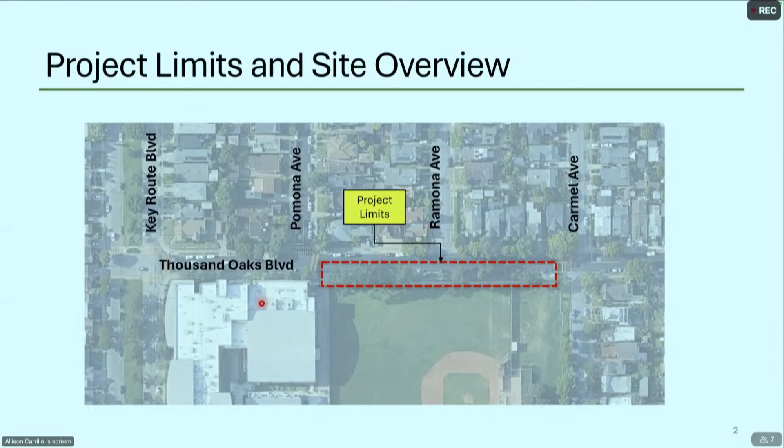There you go, the project limits are shown. The impetus of this project has a lot to do with incremental improvements done in this area over the last period, including early in the 2000s when the Thousand Oaks Boulevard sidewalk was reconstructed in front of Albany High School.

There was an extension of the sidewalk on Carmel Avenue in the early 2000s, and then a recent extension as part of the dog park project. What that's created is a legitimate gap, where we have pedestrian paths of access on all sides and a center path that does not meet ADA requirements.

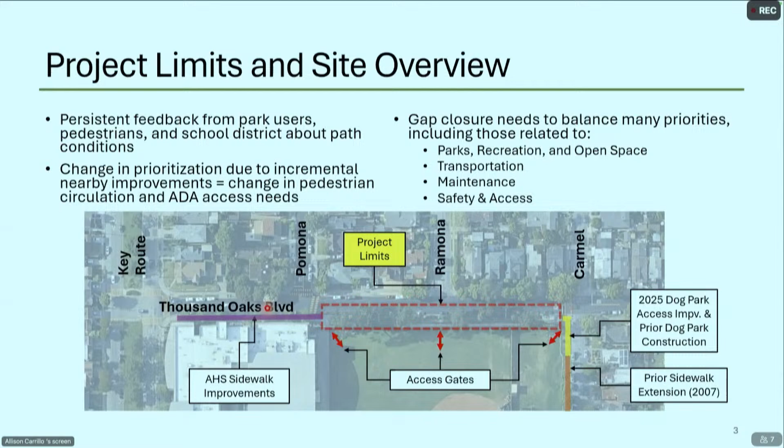So this existing path is in poor condition. I understand there are some people in the neighborhood. It's impassable for anybody in a wheelchair. We aren't able to repair it any longer. This is in a condition where it's a full rebuild.

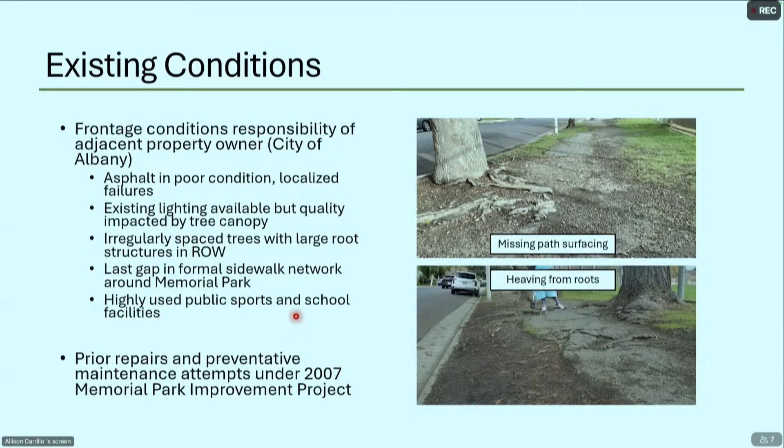The path condition has something to do with the root upheaval we're seeing, but also just age. It's just an aging path, and it's highly used for both access to Memorial Park, the public sports fields, and school facilities in all directions. There were prior maintenance attempts in 2007, but they did not last and still need work.

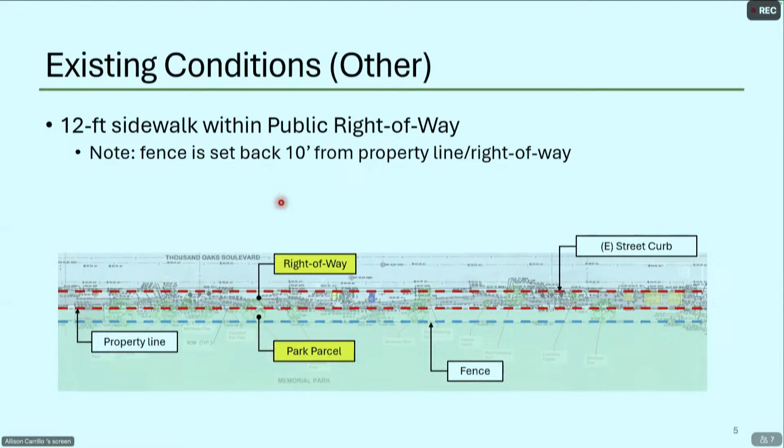Other existing conditions: while it looks like a very wide right-of-way, the fence is actually set back about 10 feet. So the right-of-way itself is a 12-foot right-of-way as it exists, with a 12-foot sidewalk within the right-of-way as currently exists.

Inside this area, there's a number of trees, irregularly spaced. We have 7 Monterey pines, primarily on the southern side of that area within the parcel. Inside the right-of-way, we see cedars, gum trees, Australian tea trees, and California peppers.

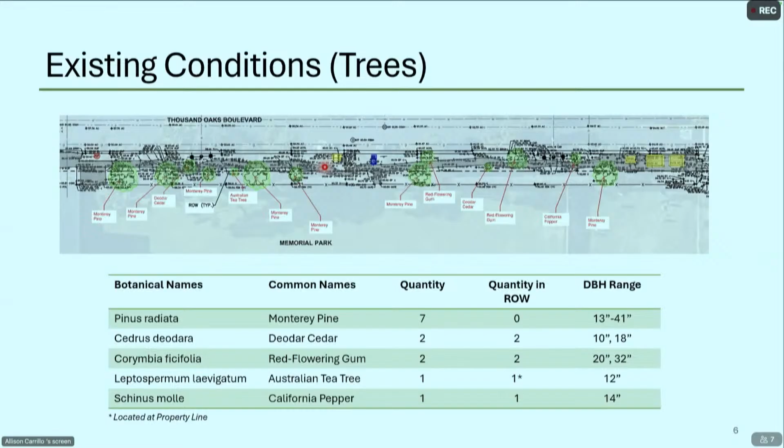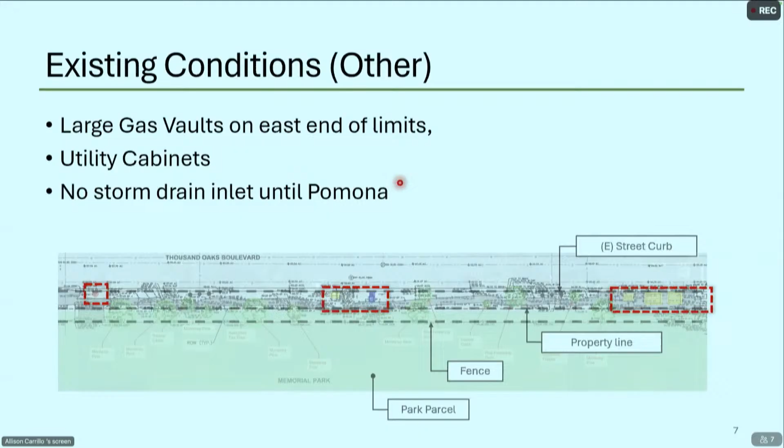Additionally, there are some large gas utility vaults on the eastern end, utility cabinets that dot the frontage, and there's no storm drains until we hit Pomona.

Existing conditions on the roadway are actually quite interesting. The varying width, to me as a civil engineer, maybe less so to others, but the street actually narrows next to the high school. So there's a 32-foot wide roadway at the high school side, and it widens out to 36 feet in the area of the actual project. There's some discussion about this later, so I just want to bring that up, that it's not a consistent roadway width.

We have received complaints about the narrowed roadway between Pomona and Key Route.

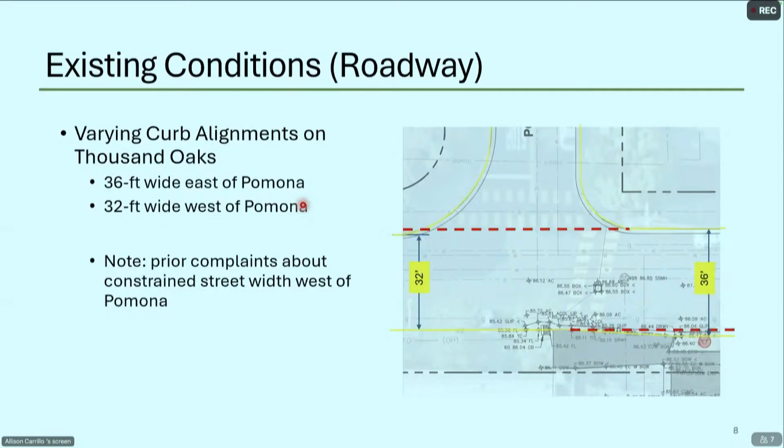The existing condition on the sidewalk is 3.5 to 4.5 feet wide. 4 feet is the minimum by ADA requirements, and 5 foot is our city standard. 5 feet is what we also need in order to avoid having to have passing space every so often for people under ADA. Now, the connecting sidewalks are very different, and to be fair, this is not a sidewalk.

It's more like a park path, the existing pathway. But the formal sidewalks to either side range from a 12-foot wide sidewalk with tree wells in front of Albany High School, to 5-foot wide curbside sidewalks on the Carmel side. In both cases, the sidewalk is immediately adjacent to parking.

So when we're looking at the design and conceptual planning for this project, we're trying to balance out the need to preserve trees or minimize impacts to trees, pedestrian circulation needs, and the adjacent public facilities and infrastructure. The trees are beautiful and we want to preserve as many as we can within a reasonable outcome. Pedestrian circulation is important for park access, school access, and also the ball fields and sports. Additionally, we really want to make sure that whatever work we do here is durable and long-lasting.

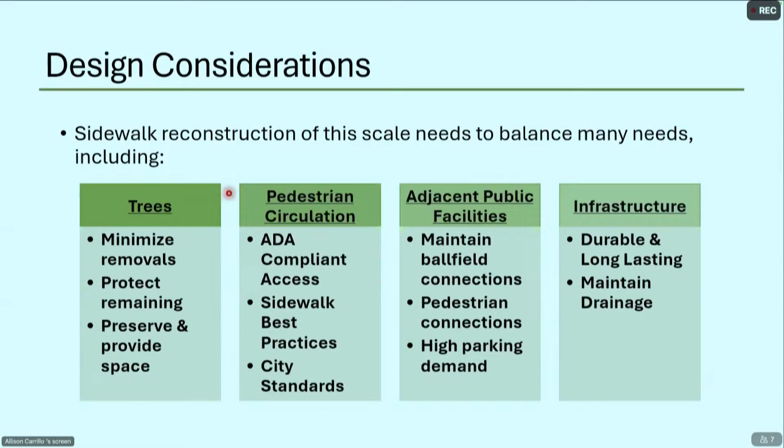With that, I'll jump into a brief overview of the details of the 3 alternatives that were posted. Alternative 1 is essentially trying to keep the path in its existing condition, weaving between trees, but widening it to become a formal concrete sidewalk. While this type of meandering sidewalk is discouraged under ADA, it's not prohibited. We would be looking at trying to straighten the path out, because right now there are some very sharp turns on it, but it is more challenging for people who need mobility devices.

Go back to that. So you can see here I'm representing where the path is located in space with this box in yellow.

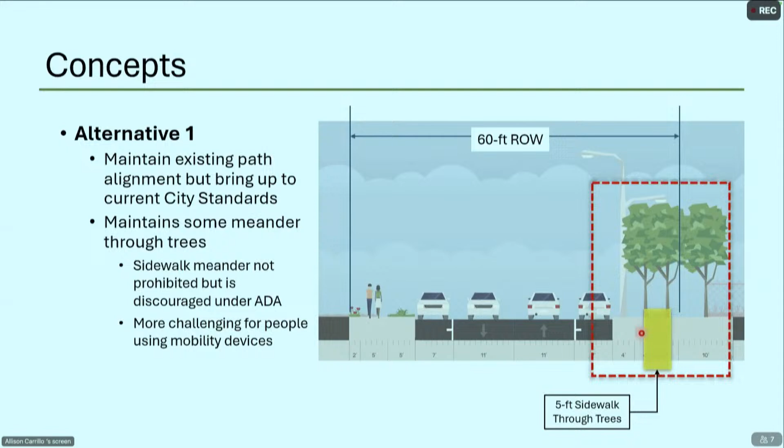Alternative number 2, we're looking at something more similar to what exists at the 2 connecting sidewalks. What we show in the alternatives is a 12-foot sidewalk, to match the Albany High School version, and that allows for tree wells on the curbside as well as a planting space behind the property line next to the fence.

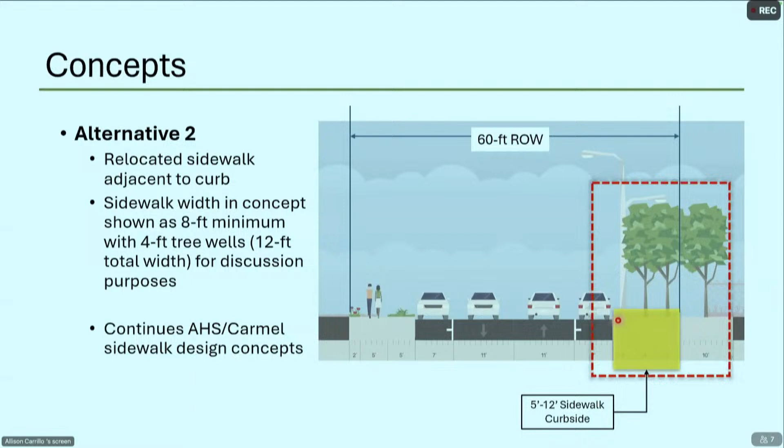But it can be narrowed down to 5 feet. So just a quick view of what it looks like - this is Albany High School, and then Carmel.

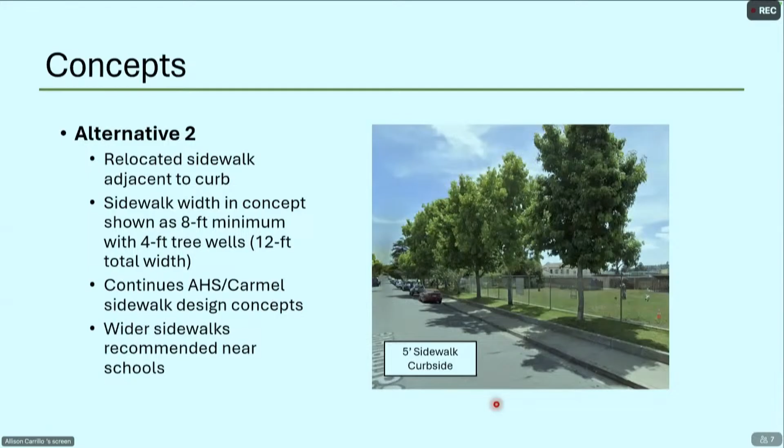So the last alternative, what I'm calling alternative 2A, because it really is an expansion of the second alternative rather than a fully new concept, is to look at balancing the width of the sidewalk, and looking at ways to gain a few extra feet because this roadway is wider in this area than the constriction to the west.

This wouldn't be restricting it down to 32 feet, and that's where we're getting the complaints. We're looking at potentially a 2-foot curb adjustment, and what that does is give us a little extra room so we're getting further away from some of the larger trees next to the fence line.

However, doing this option does require more detailed communication with the Transportation Commission and community, because it's a wider change that impacts more than just the sidewalk or curb to property line area.

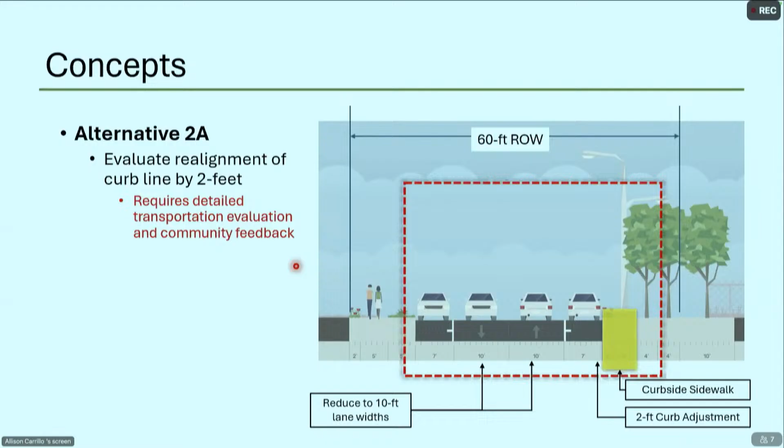It moderately increases the amount of pervious area here because we would be moving some of the roadway into part of the sidewalk, minimizing reduction in infiltrative areas. And it's similar in cost and scope to alternative 2, assuming a similar sidewalk width.

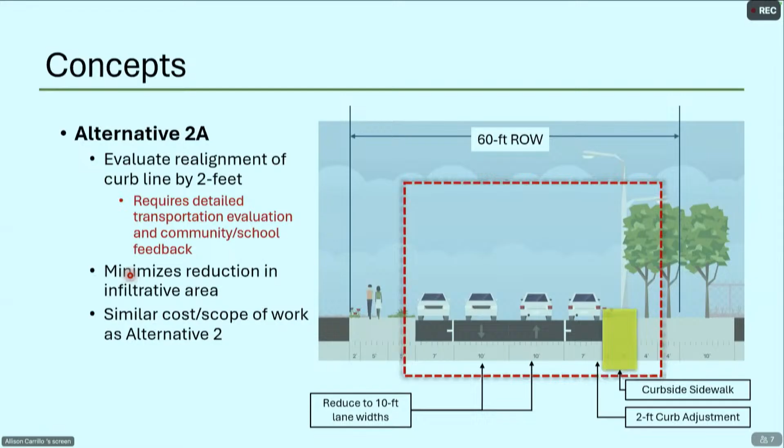So without getting into great detail on the plans themselves, I want to go over some comparisons. With alternative 1, going back to how I started this meeting talking about looking to the future and placemaking, not a simple repair - if we keep to the existing condition, we're formalizing the irregular path and tree layouts.

With alternative 2, it's the best for navigation by people with visual impairments or mobility devices - it keeps your path of travel the most straight. Alternative 2A would have some gentle curves.

In terms of the trees, trying to still keep the path in its existing condition, we'd be very close to root flares on a lot of trees. Without detailed design it's hard to tell exactly what the impacts are, but it also maintains irregular spacing and irregular planting spaces for future trees.

Alternative 2 is interesting because it allows for more moderately sized trees on both sides of the path, since you could potentially have tree wells and planting and trees against the fence - creating a kind of a tree-lined walking path.

But the tree wells would be small - 4 foot by 4 foot planting spaces - and overall would have less planting space for trees.

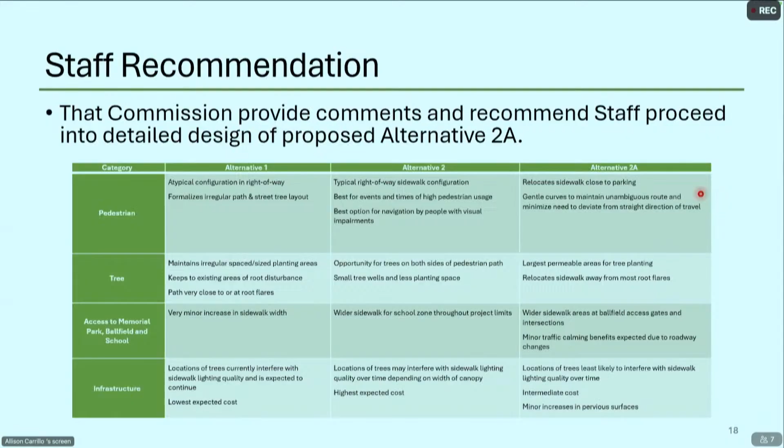Thank you. You don't want to talk more? There's plenty of time. Good. All right, we'll take it back to commission questions. Any quick questions? I think you laid it out very clearly.

So on option 2A, you mentioned that the curb would be moved into the street a little bit, and it's still listed as a moderate expense. That seems like a big expense, but maybe it's simpler than I thought. Is there no interference with the drainage? We don't believe so. In terms of the expense, the reason why it's a moderate expense is that we would not have the 12-foot sidewalk width with that option the way it's laid out here. So it's a 5-foot sidewalk, which is less costly.

Alternative 2 already requires that we rebuild the curb and gutter in order to do the work, so it's an expansion with a slight decrease in sidewalk width compared to alternative 2. Alternative 2 is the most costly, simply because of the amount of concrete we'd be doing, and likely more tree removals as well. That's alternative 2, where we're matching the school district and Carmel Street aesthetics and approach. Back to 2A, we would be trying to narrow that sidewalk width a little bit more, so the cost would likely be less than alternative 2, but still more than alternative 1.

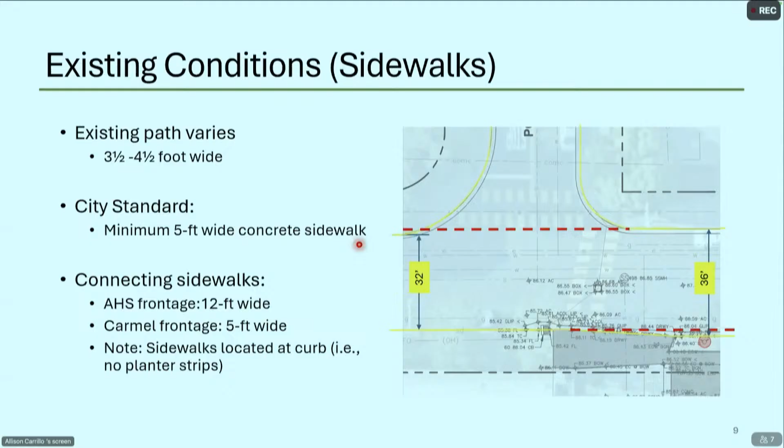Okay, we'll bring it back for discussion. And really, you're looking for feedback and some direction very early. You can't really say what trees might be removed or not because it's much too early for that. But what do we think?

I just had a couple - that's a really good question. I'm looking at the street view. I still can't quite wrap my head around how it's still a straight line, but I trust you.

But one thing I'd say is, I appreciate the alternative 2A and the staff thought that went into that as a really nice creative solution. And I feel like it's in line with a lot of other sort of taking back the streets and giving more to the public to enjoy. So I really like that trend.

I do think it would be great in terms of pitching this to talk about aesthetic benefit, right? I don't know that that's really included there, but I do think a larger sidewalk and more space to walk, bigger tree wells, is an aesthetic benefit and a quality of life improvement in and of itself. So I just want to say I think that would be nice to include in there, in the sort of flow chart that you have.

But I'd also say that I appreciate the emphasis on trying to keep the trees. I would say that some of those trees are mature, but they're not large canopy. They're actually kind of spindly. I think there's a way, when we had the street tree management plan and that whole analysis of the canopy, that's an example. Those are several examples of big mature trees with very little canopy, not even much shade.

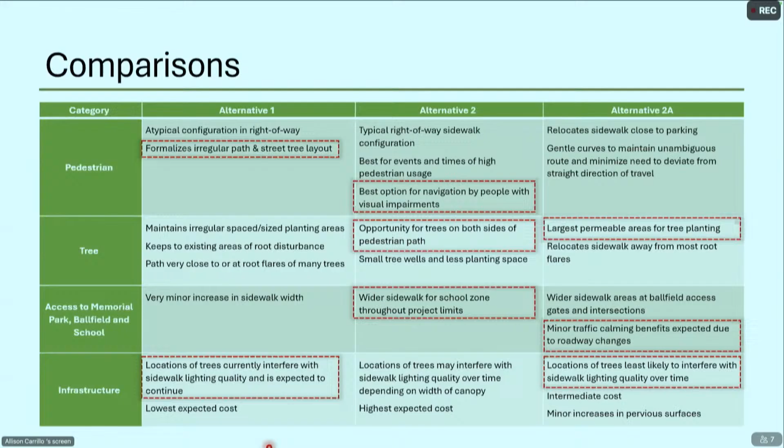And if it costs very little more to just extend it out a foot and a half or so, I'm for that. I am concerned, though, that there might be some hidden costs, like the couple lights there that I think are probably a foot and a half in off the curb, so they'd have to be moved too, or they're going to be in the middle of the walk.

Let me grab that concept plan layout. Again, this is concept plan. It might end up being 5 feet, 12 feet, as we're discussing right now, and there's any number of iterations in between, so it's more of a range. Yeah, I realize it's just a concept, but just some things I was thinking.

Yeah, there's that funny utility down there. What's that utility box? That's a gas regulator. Could all of those boxes be undergrounded? I don't believe so. Not easily and without great heartache. But in principle, I'm for 2A.

So here's kind of the ideas around the tree wells. These are a little sharp, but essentially what's shown... oh, it's not shown. Popping up? Interesting. Try again.

Here we go. So we would be maintaining a 5-foot path around the streetlights by curving, is the idea. I do want to point out this is a survey marking. It is not oriented in the right direction. The streetlights actually head out over the roadway and over the sidewalk, so it's actually at 90 degrees to what is shown in the plans.

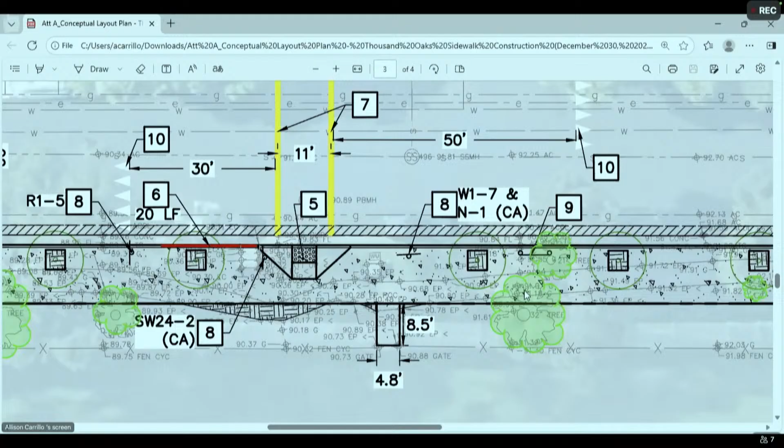But in alternative 2A for that same location, we would have to adjust the path around it. Here's that same meter box. We would be bringing the path next to the curb and widening out here where there's an entrance to the ball field, and we would naturally be seeing more people anyway. But in order to avoid constrictions here, a person would have to deviate from their straight path to get around.

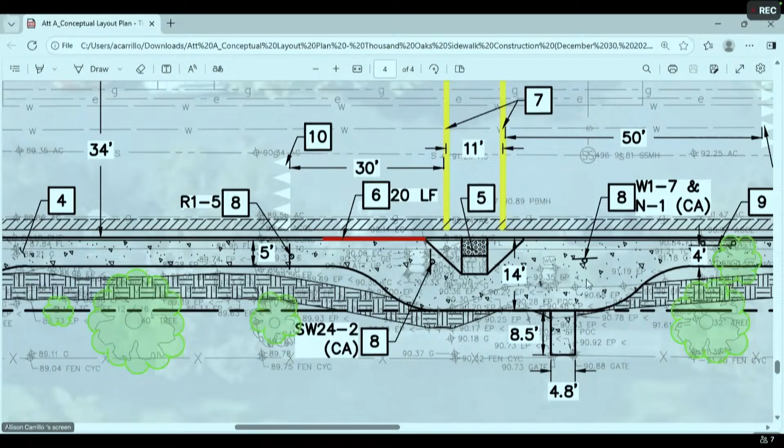Students and youth are legally allowed to ride bicycles on sidewalks, so something like a hazard in the middle of the sidewalk would need to be marked and padded and whatever else, wouldn't it, or something?

I wouldn't say that's a requirement anywhere that's high enough to be visible. This isn't something that's not visible, and we generally don't have the same traffic safety requirements on a sidewalk, where it's expected to be a pedestrian zone, that we have in a roadway. So we don't pad every vertical box around the city in a sidewalk just because students can ride bikes on it.

There's some next to AHS, but is that where the bike path is? Correct, so that's a bike facility. It's considered vehicular traffic to a great degree, and you'd expect to be riding much faster on a dedicated bikeway.

But that's something we'd be looking at in detailed design to see if there's any need for it. Again, this is supposed to be a pedestrian zone that children are allowed to ride safely on. There's an advantage that it would slow that traffic potentially. But also, if it's dark, you don't want to surprise people.

I would just say there are boxes like that all over the sidewalks. But yeah, it's not unusual. Well, there's some that are up to here, like the telecommunications one, but something that's knee-high is going to be a little different.